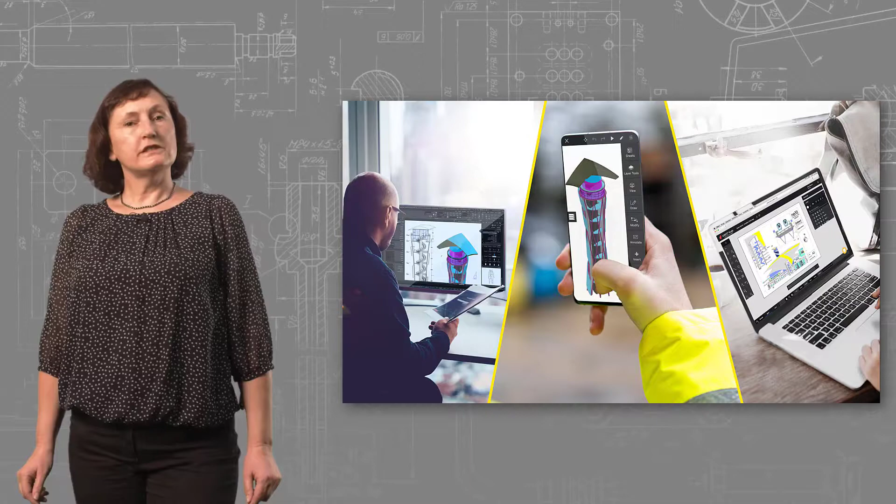You can imagine that many users work on such a project, in the office and also on construction site. Some users work with ARES Commander, others with our mobile version ARES Touch or our cloud version ARES Kudo. The goal is to ensure that everyone works together efficiently.

Let's start with this email notification I received. We see in these notifications comments added by other users, including transcription of voice recordings into text. In this case, a colleague on site shared feedback on a drawing of the project using ARES Touch.

Each user can define how often they want to see such notifications, individually for each file and generally by default. Now let's open the file. This file is stored in the new ARES Kudo drive, but it could also be in any other cloud storage.

Since ARES Commander was detected on this computer, I now have two choices. I can open this file in my internet browser with ARES Kudo, view and modify it there, or decide to use ARES Commander instead. So let's use this new option, Open in ARES Commander.

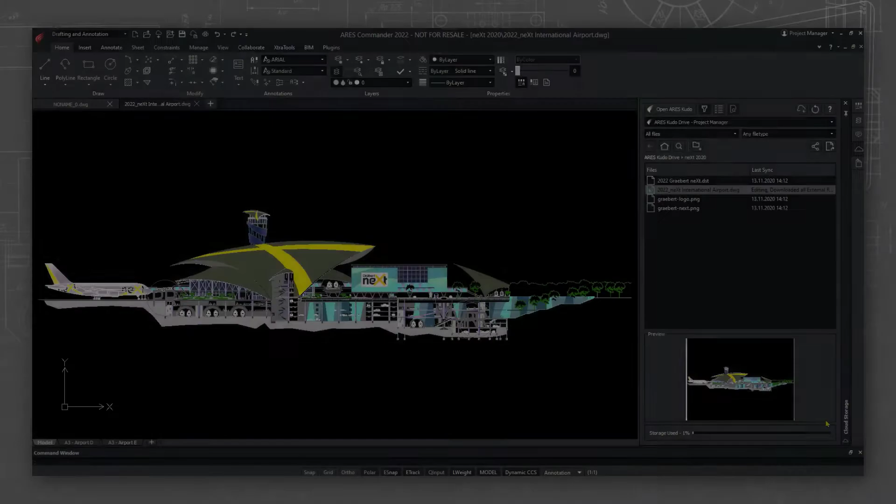In the commenting palette, I can see the different types of comments, markups and stamps. For this drawing, I can find a voice recorded comment and several inserted pictures.

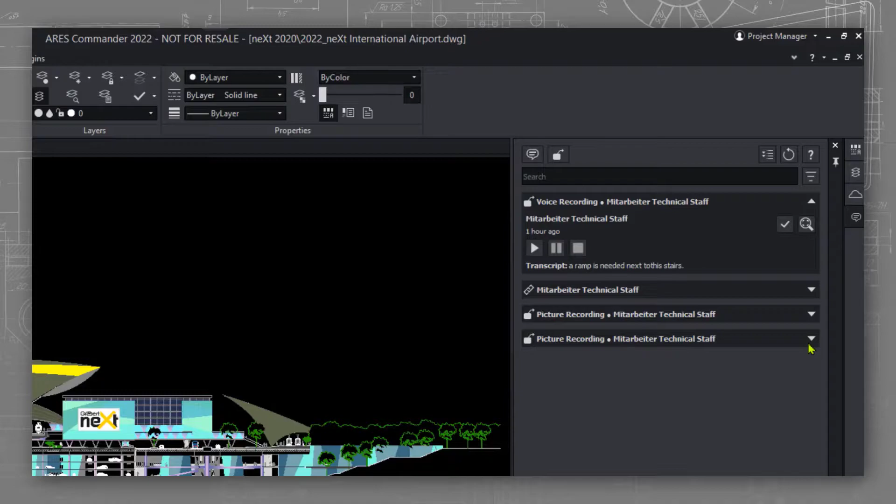Voice recording markups can be used on ARES Commander, Touch and Kudo, but they are especially useful on the smartphone, where it is easier to record your voice than to enter text. Transcription of voice recordings is powered by artificial intelligence from AWS. The same is true for the auto-tagging of images.

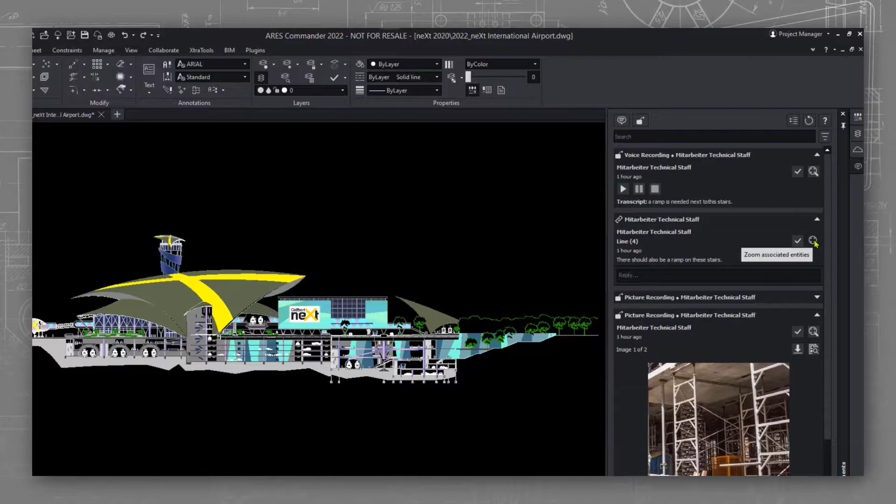As you can see, one comment is linked to some drawing entities. We can zoom in on them. A ramp is needed in this area next to the stairs. That's the problem I need to fix in this drawing.

I have already worked on a solution for this problem. Let me switch on the new layer with a prepared ramp.

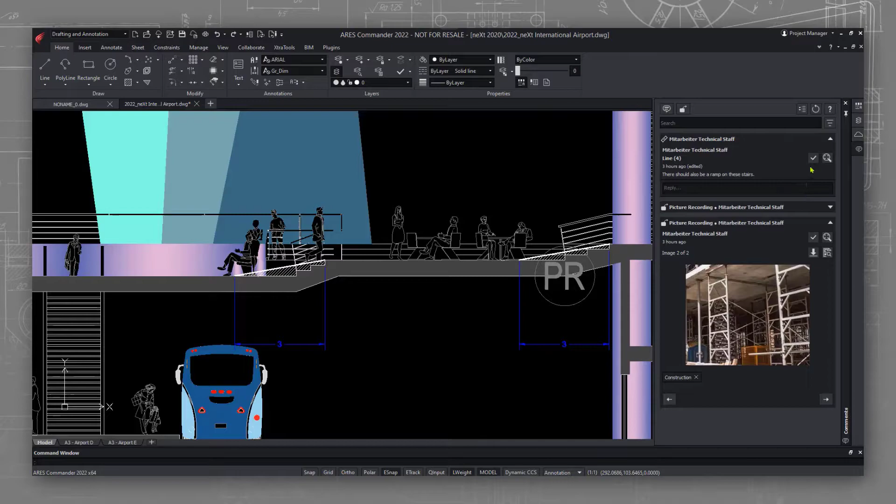After my changes, I can resolve the comment and ask for verification with a stamp markup. We want to have the changed design approved.

I save the drawing and you can see in the cloud storage palette that the modifications are instantly synchronized. My customer will now also receive an email notification just like me before. Following the same steps, he will open the drawing in ARES Commander or on the way with ARES Kudo.

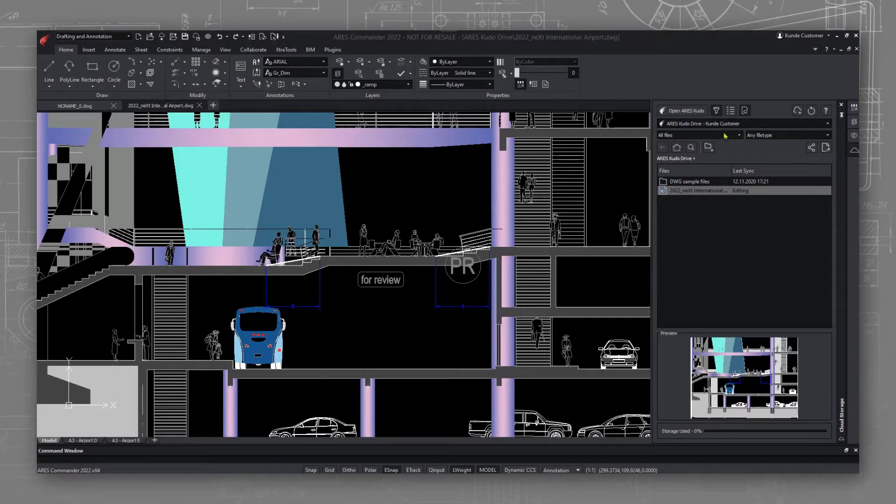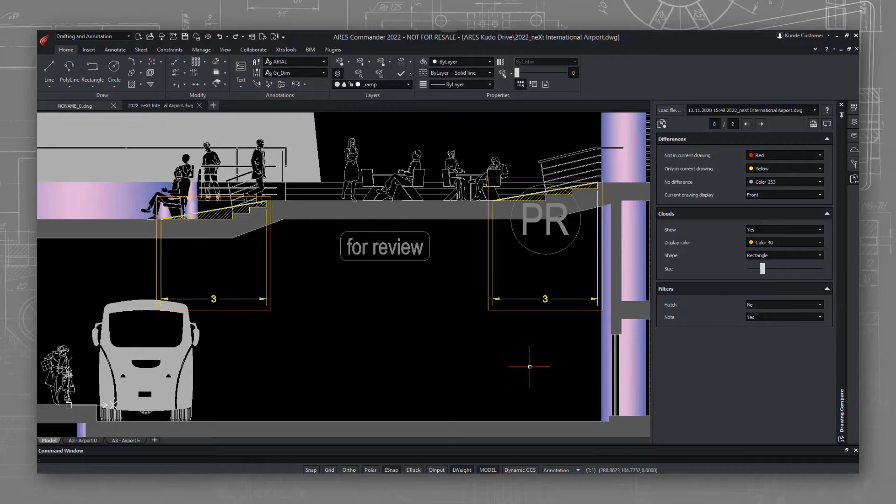To understand the changes, he could use the new version history, which is also available in ARES Kudo. He can use, for example, the Compare button to compare my latest version with the previous one. So it is easy to find the recent changes and to see the differences between the different versions of the same file.

To compare with another file on our computer, we could use instead the Drawing Compare palette. Let's say my customer likes what he is seeing.

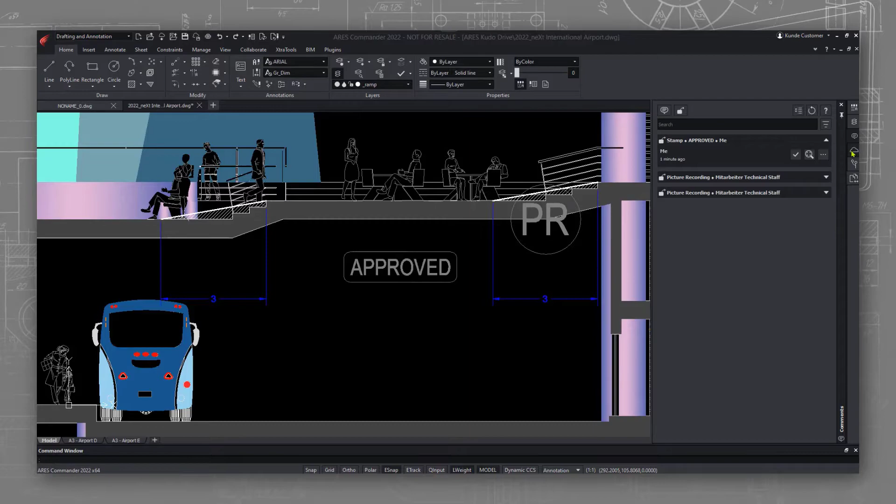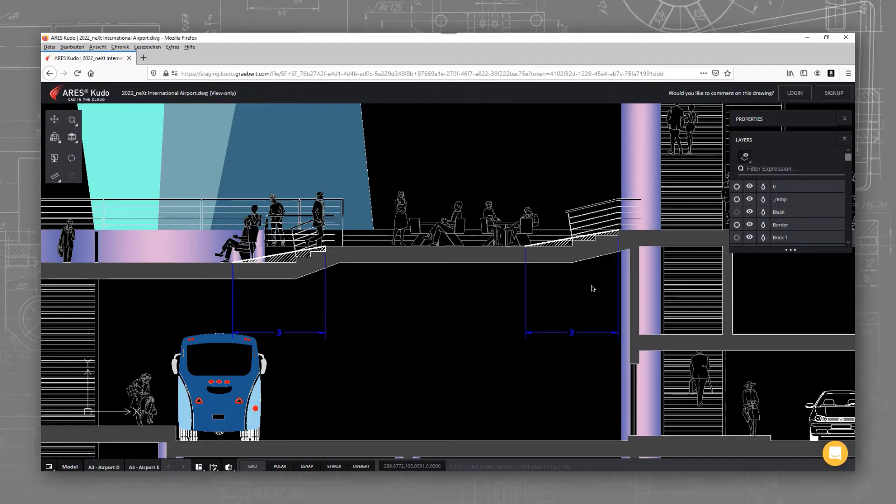So he will now generate a view-only link that he will send to his partner for validation. By opening this view-only link, his partner can view the project in all details. He can call up properties or measure areas, distances and angles.

But you can also see that it is possible to log in even if this user does not have a paid license. The customer can activate a free account that allows them to use the comments palette and give feedback or simply validate the project.

Let's recap. There are unique collaboration features offered by the ARES Trinity. And there is a new ARES Kudo drive to explore all features without needing to connect any third-party solution.

ARES Kudo drive comes at no additional cost, but you need to stay on subscription, like you do for all the other Trinity features.